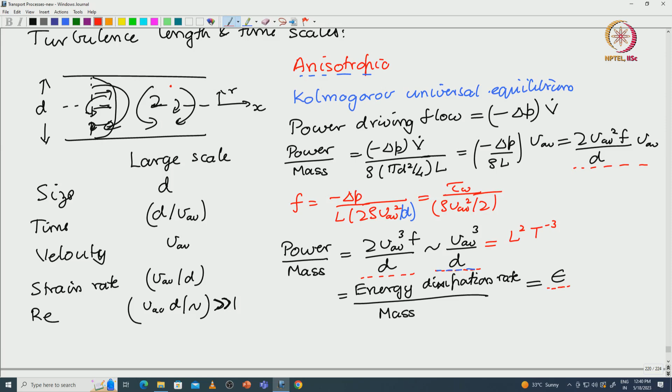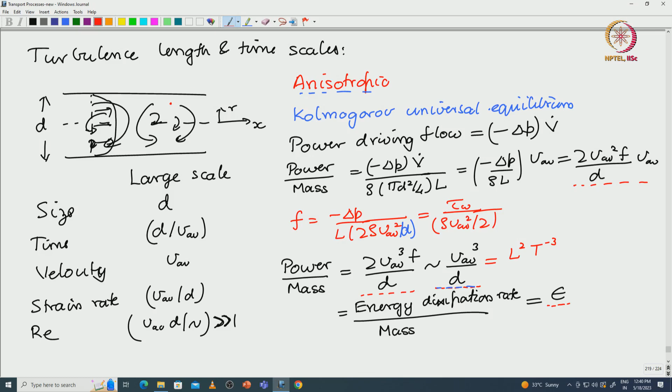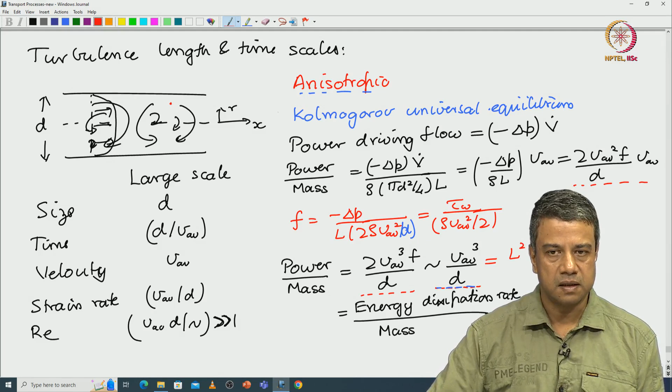We had calculated the smallest scales from the requirement that all of the power that is input at the large scales has to be dissipated by viscous dissipation at the smallest scales. That was one consideration. The other consideration was that the smallest scale features do not depend directly on the length and the velocity of the large scales. It depends only upon the rate of dissipation of energy per unit mass, whatever energy is input at the large scale has to be dissipated at steady state. That is one requirement. The second requirement is that the dissipation is due to viscosity, and therefore the small scales depend on the energy dissipation rate per unit mass epsilon and the kinematic viscosity.

Based upon that, we had got the smallest scales, the smallest Kolmogorov length, time and velocity scales, as well as the strain rate. These are Re power minus 3/4, minus 1/4 and minus half smaller than the large scales. Therefore, the smallest eddies have a length that is Re power minus 3/4 smaller than the large scales in the limit of high Reynolds numbers. The velocity is Re power minus 1/4 and the time scale is Re power minus half.

Strain rate in the smallest eddies is much larger than in the large scale eddies. It is Re power plus half larger. What that implies is that the energy dissipation rate in the small scales is much larger than that in the large scales, and it is equal to the energy input per unit time in the large scales.

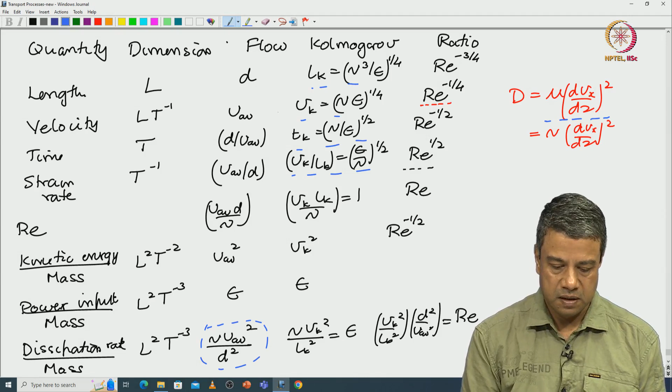So the picture that we had was of a cascade of turbulence, where energy is put in at the large scale due to the pressure difference that is applied across the ends of the pipe. Due to an instability of the laminar flow, there are eddies of different sizes that are created all the way from the large scale, the pipe diameter and the mean flow velocity, down to the Kolmogorov length and velocity scales.

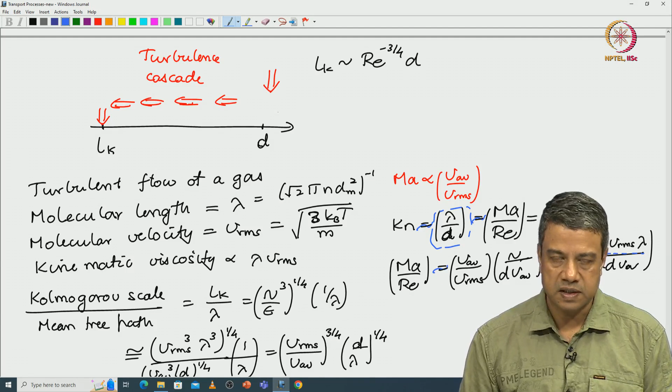At the Kolmogorov length and velocity scales, the Reynolds number based upon the Kolmogorov scale is 1. The Reynolds number based upon the large scale is much larger than 1, but the Reynolds number based upon Kolmogorov scales is 1. That means at the Kolmogorov scales, the inertial and viscous effects are comparable. Energy input at the large scale is dissipated by viscosity at these smallest scales. So the flow itself creates smaller and smaller scales such that at the smallest scales the energy input is equal to the energy dissipated, and that is how a turbulent flow is sustained.

Energy is put in at the large scales, the flow creates smaller and smaller scale eddies until all of the energy is dissipated at the smallest scales.

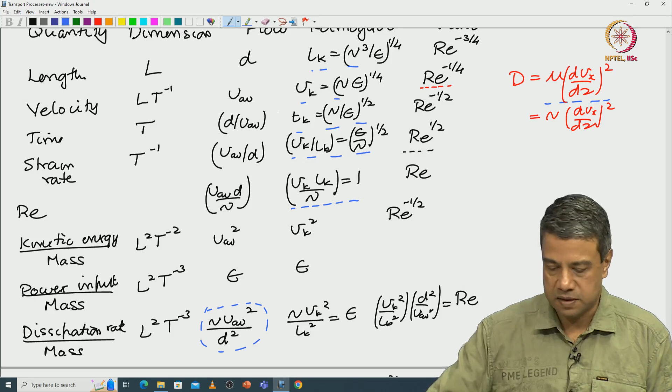I had shown you that for turbulence in a gas, the length scale of the Kolmogorov eddies is much larger than the length scale for the gas molecules, the molecular scale, that is the mean free path. For gas molecules, the molecular scale is the mean free path, the velocity is the RMS velocity, and the kinematic viscosity is proportional to the mean free path times the RMS velocity.

In these arguments that I make, I will assume that there are proportionality constants which we are neglecting, just to compare the orders of magnitude. We are not worried about constants that are order 1, we are only comparing the orders of magnitude.

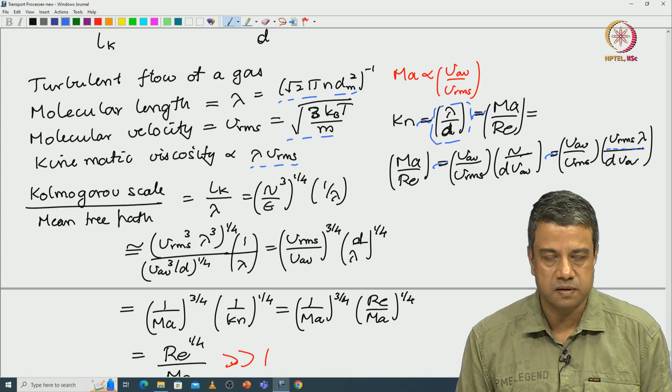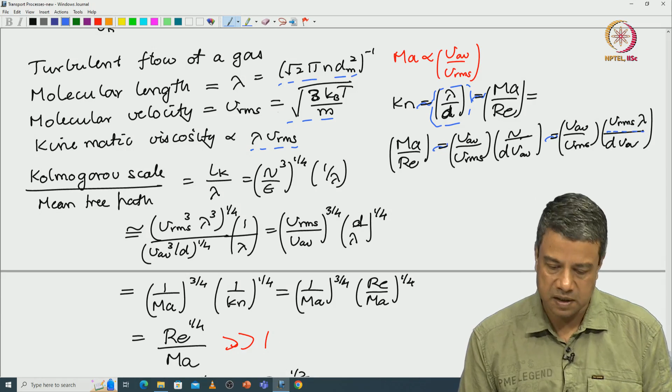So if I write the ratio of the Kolmogorov scale and the mean free path, and then substitute the mean free path times the RMS velocity for the kinematic viscosity, the ratio of the Kolmogorov scale and the mean free path is equal to Re power 1/4 divided by the Mach number.

For incompressible flow, the Mach number is much smaller than 1, the velocity is much smaller than the speed of sound. So the Mach number is much smaller than 1. That is the limit in which the continuum approximation is valid, when the flow velocity is much smaller than the molecular fluctuating velocities.

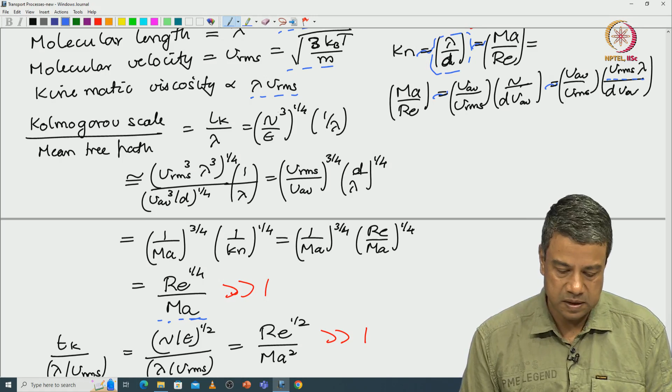In that case, Mach number is much smaller than 1, Reynolds number is large, so the ratio is large. Similarly, if you compare the time scales, the ratio becomes Reynolds number power half by Mach number square, which is also much larger than 1.

So turbulence is a continuum phenomenon. Even the smallest turbulence scales are much larger than the molecular scales in gases, in liquids also, because the molecular scales in liquids are much smaller than the molecular scales in gases.

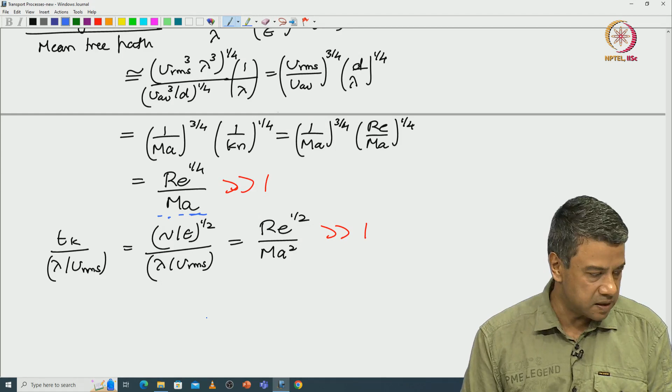So what we had discussed so far are the general characteristics of turbulence. Now let us examine the turbulent flow in a pipe in some further detail.

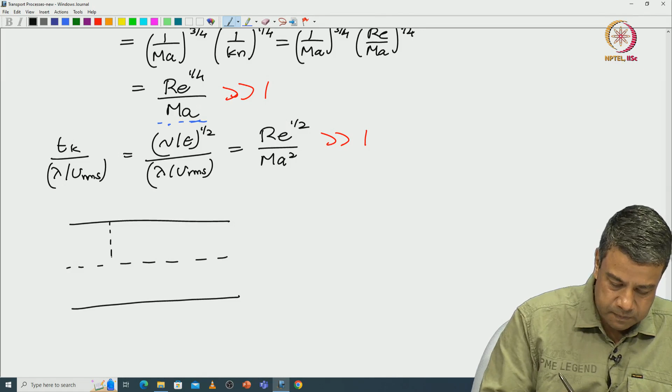Velocity profile in a pipe is more plug like at the center and has sharper gradients at the walls in comparison to a laminar flow at that same Reynolds number. A laminar flow at the same Reynolds number will have a slower, smaller gradient at the wall, and it would have a higher curvature at the center, at that same Reynolds number.

And there are large cross stream velocity fluctuations which tend to transport momentum across the pipe. Velocity fluctuations at the large scale are anisotropic. The fluctuating velocity in the flow direction is much larger than that in the cross stream directions.

At the smallest scales, these are isotropic. The velocity fluctuations take place, having roughly the same magnitudes in all 3 directions, for the smallest Kolmogorov scales.

Both the mean velocity and the fluctuating velocity have to satisfy the condition that they decrease to 0 at the wall. At the wall of the pipe, we have a no slip condition. So therefore, both the mean velocity and the fluctuating velocity have to decrease to 0 at the wall of the pipe.

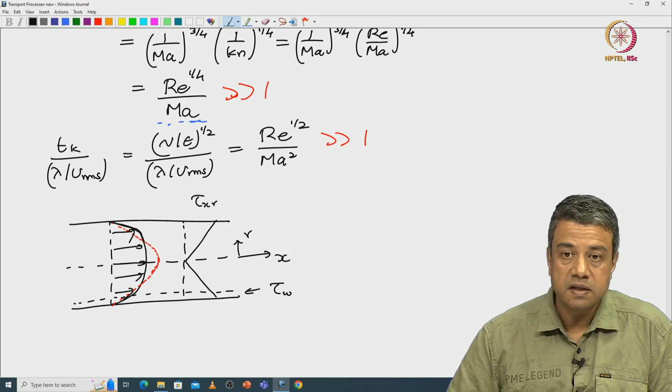This region where momentum transport close to the wall is by viscous diffusion, where the fluctuating velocity decreases to 0 and therefore momentum transport is due to viscous diffusion, is what is called the viscous sublayer.

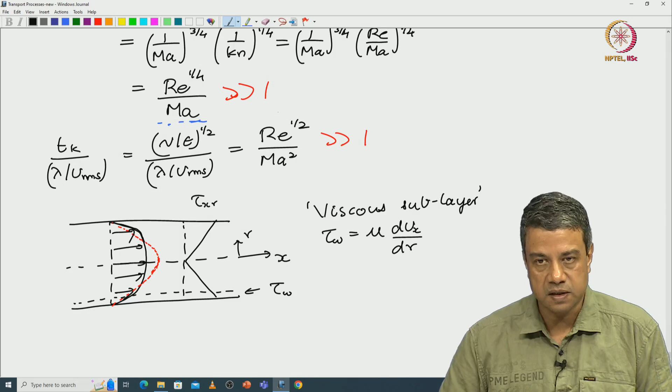And in this region the wall shear stress is equal to the viscosity times the velocity gradient close to the wall, because close to the wall the velocity fluctuations have to decrease to 0, so stress transmission has to be only due to momentum diffusion within this viscous sublayer.

In this viscous sublayer the velocity is much smaller than the velocity in the bulk, because the velocity decreases to 0 at the wall. What is the velocity scale in this viscous sublayer? You can get a velocity scale just from the consideration that because this viscous sublayer is very thin, the stress is approximately a constant. The stress varies very little within this viscous sublayer, and therefore this is basically a constant stress region.

So based upon the stress and the density, you can see that from dimensional analysis a velocity scale can be written as tau w by rho, whole power half. This is what is called the friction velocity.

A velocity scale that is determined from the wall shear stress and the density close to the wall is what is called the friction velocity.

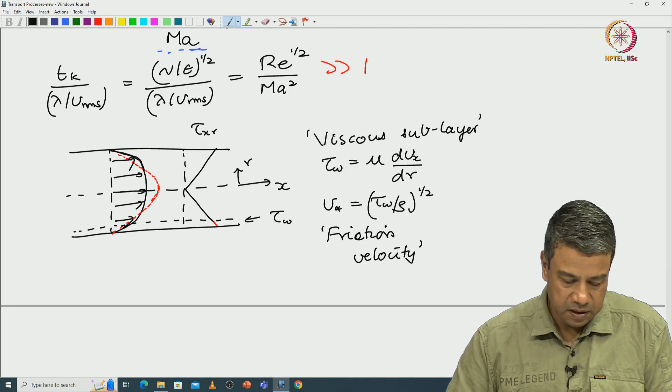If you focus closely on the region close to the viscous sublayer, the velocity in this region is increasing linearly. In the viscous sublayer, the velocity is much smaller than the average flow velocity.

That means you can scale the velocity in the viscous sublayer by the friction velocity alone. So the relevant velocity scale for the viscous sublayer is not the average flow velocity. Recall that when we solved for the bulk flow in the pipe, we had defined the scaled velocity as the velocity divided by the average flow velocity.

The velocity in the viscous sublayer is much smaller than the average flow velocity, and the velocity scale in the viscous sublayer is the friction velocity. Therefore, the scaled velocity in the viscous sublayer can be defined as Vx plus, which is equal to Vx by V star. That is the scaled velocity in the viscous sublayer.

What is the characteristic length scale for the viscous sublayer? The characteristic velocity scale in the viscous sublayer is the friction velocity, the ratio of wall shear stress and density, raised to the power half. In the viscous sublayer, viscous effects are dominant because the fluctuating velocity has to decrease to zero, and therefore momentum transport has to be due to molecular diffusion.

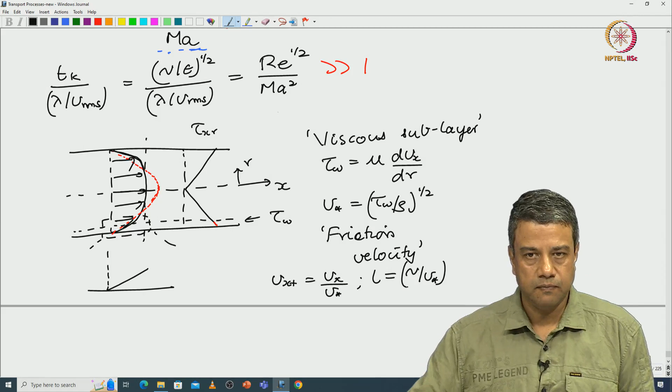Within this viscous sublayer.

If I write a distance W, which is equal to the pipe radius minus r, where r is the radius of the pipe, small r is the distance to some point within the viscous sublayer, then the distance W is the distance from the wall, which is capital R minus small r, within the viscous sublayer.

The scaled distance from the wall will be equal to R minus r divided by the length scale L in the viscous sublayer, which is equal to R minus r divided by nu by V star.

Even though the flow in the bulk of the pipe is turbulent, when you come close to the wall, from the no-slip condition, the velocity has to decrease to zero at the wall. Therefore, viscous effects have to become dominant compared to inertial effects within a thin region close to the wall. The large scale flow velocity and pipe diameter are not relevant for this.

What is relevant is only the conditions close to the wall, that is the shear stress exerted by the flow at the wall, and the kinematic viscosity, because transport is due to viscous diffusion at the wall.

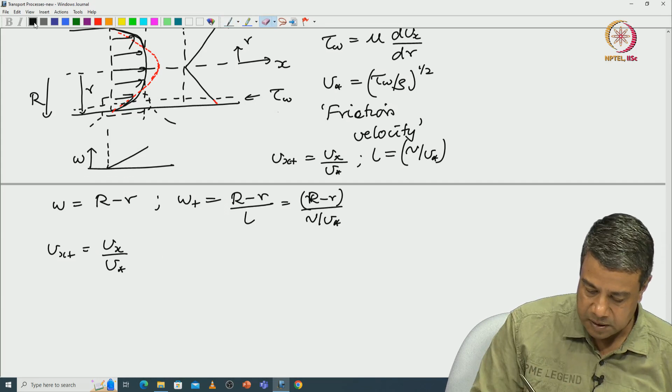The length scale can depend only on the kinematic viscosity and the friction velocity, which is nu by V star. Therefore, the velocity and length scales are Vx plus, which is equal to Vx by V star, the dimensionless velocity, and the dimensionless distance from the wall, W plus, which is equal to R minus r divided by nu by V star.

Note that the wall shear stress, tau W, is equal to mu dVx by dr, with a negative sign.

Substitute these expressions, mu V star, dVx plus by dW plus, and in going from W plus to this I will have nu by V star. I am just substituting in the expression for Vx and r, replacing Vx by V star times Vx plus, and r, the derivative with respect to r is negative, so I am replacing this by W plus here.

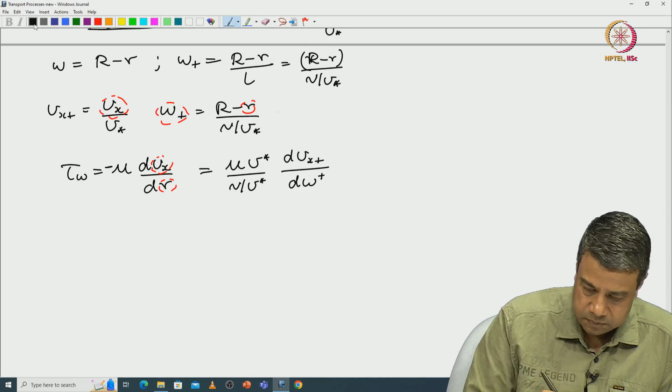Note that I had defined the friction velocity as V star is equal to root of tau W by rho, which implies that rho V star square is equal to tau W. Therefore, this tau W and rho V star square on the left and right cancel, and I find that the expression for the velocity gradient at the wall, dVx plus by dW plus, is equal to 1.

That means that if I am scaling it by the wall shear stress and the friction velocity and the length scale nu by V star, the velocity gradient close to the wall is universal, it is equal to 1. This implies that the velocity increases linearly, proportional to W plus close to the wall.

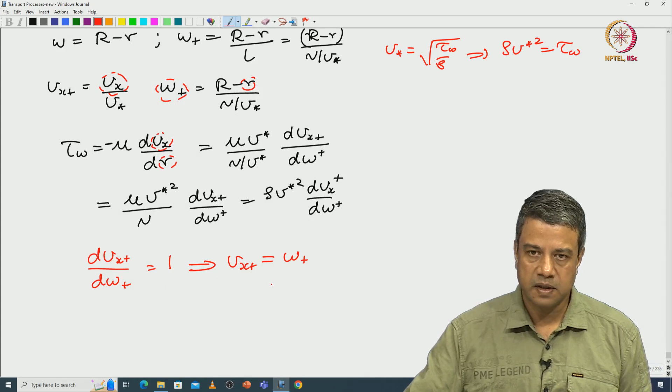So therefore you have a straight line for the velocity close to the wall where Vx plus is equal to W plus. Now this is a requirement in the viscous sublayer. What about when you go outside of the viscous sublayer? What expression for the velocity do we get from experiments? The experimental results are shown in a graph which is called the von Karman plot.

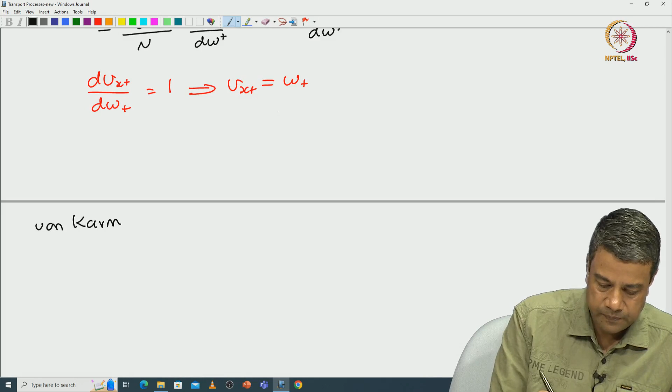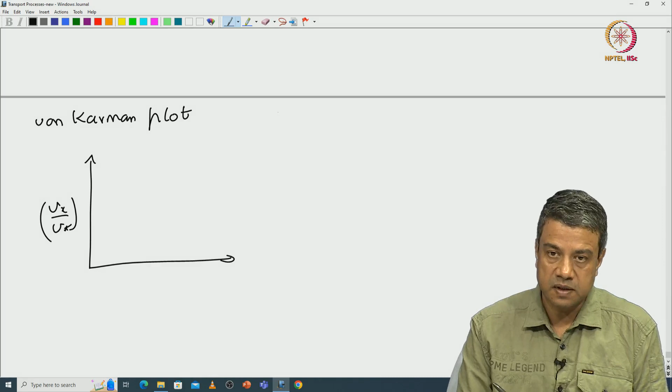Usually it is plotted as Vx by V star, where Vx is the mean velocity profile, that is, averaged over the fluctuating velocity. This is plotted as a function of log of W plus. You should plot it linearly to get a straight line of slope 1, but it is usually plotted as log, and because of that you get a curve that looks something like this in the viscous sublayer, a straight line in a linear plot.

Versus W plus, this would be 1. Let me write it in a dashed line. This would be 1 in a linear plot.

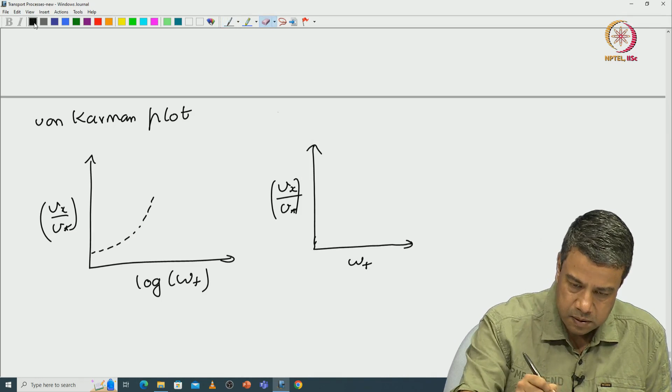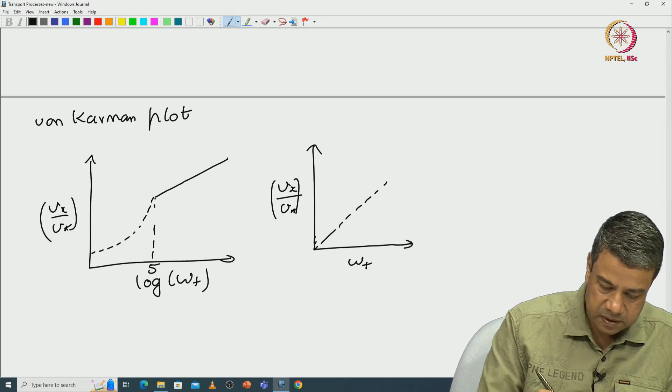In the von Karman plot, it is plotted as a function of log, which is why you get this curve over here. This happens up to a value of W plus of approximately 5. From a value of approximately 5 to a value of approximately 30, you get a straight line. So this is the viscous sublayer.

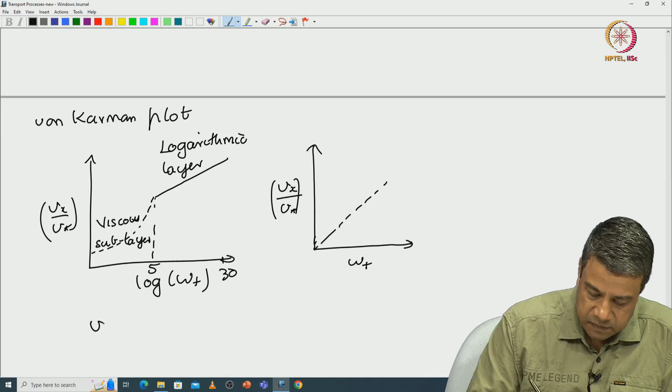And from a value of 5 to a value of about 30, you get what is called the logarithmic layer, where the velocity follows approximately a logarithmic profile. That velocity Vx plus can be written as 1 over kappa, log of W plus, plus a constant.

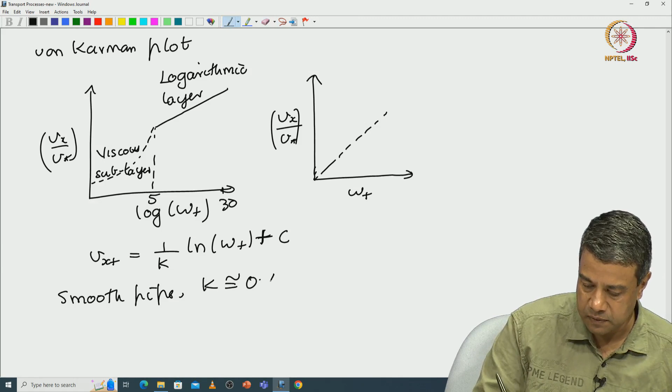So you get a universal viscous sublayer when you define it as velocity scaled by friction velocity, and then you get a universal logarithmic layer. For a smooth pipe, kappa is approximately 0.41 and C is approximately 5.5. This is for 0 less than or equal to W plus less than or equal to 5, this is from 5...

So that is the universal velocity profile that we see in this von Karman plot. It is linear up to the viscous sublayer, which is a requirement because the fluctuating velocity has to decrease to 0, the stress has to be viscous, and therefore the velocity gradient has to be constant in this constant wall shear stress region. Beyond that point, you can show using asymptotic analysis that the velocity has to be a logarithmic function of position. That calculation is outside the scope of this course, but nevertheless this logarithmic dependence is seen in experiments.

I should caution you here that these constants are approximate. This is an active area of research where progress is continually made, and these constants by latest estimates are slightly different from the classical theories proposed for this viscous sublayer and logarithmic layer. However, these are still approximate constants that can be used to make estimates.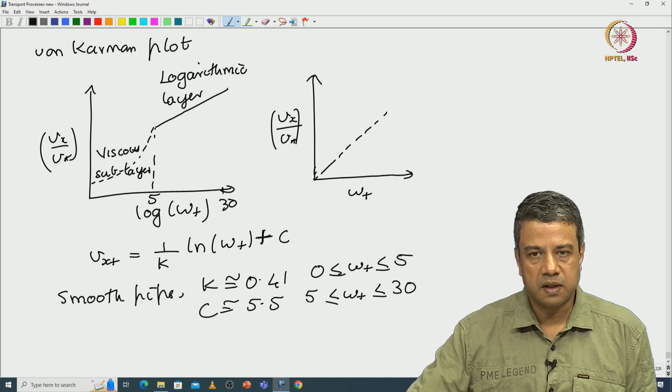And then you have a bulk flow near the center of the pipe. So this region very close to the wall is the viscous sublayer.

W plus less than 5. From 5 to about 30 is where you have the logarithmic layer, and then beyond that you have a plug flow, where there is virtually no change in the average velocity with respect to position - a plug flow. So, this is the structure of the flow in a pipe.

Even though the flow is turbulent, very close to the wall it has to become viscous dominated because fluctuating velocities have to decrease to 0. That happens when W plus is less than about 5, or the distance is less than about 5 times nu by V star, where nu by V star is this length scale close to the wall. V star is the velocity scale based upon the wall shear stress in the region close to the wall where the stress is approximately a constant.

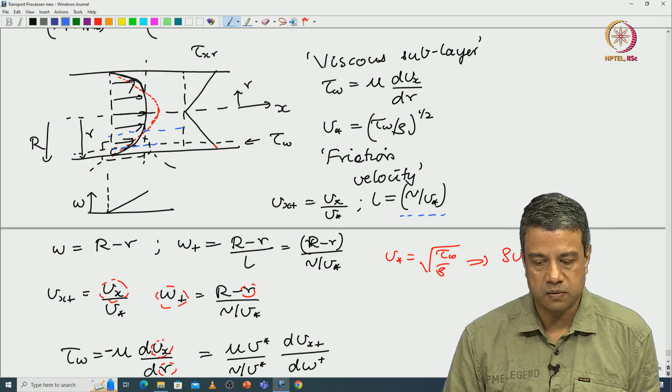So, these are the characteristics of flow in a pipe. And finally, I will end with a problem of how the friction velocity is related to the flow Reynolds number. The flow Reynolds number and the friction Reynolds number, how are they related? And how can we estimate the friction Reynolds number from the flow Reynolds number? So, what is the friction Reynolds number?

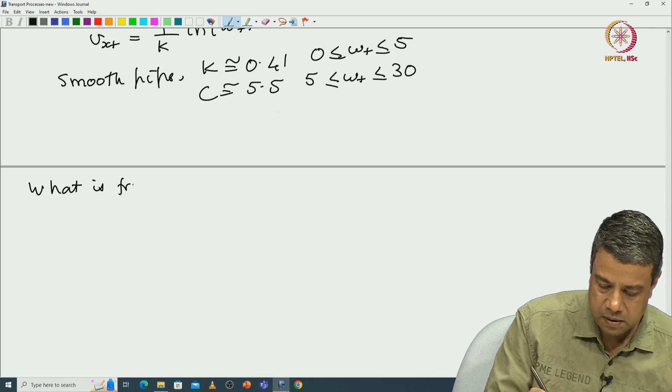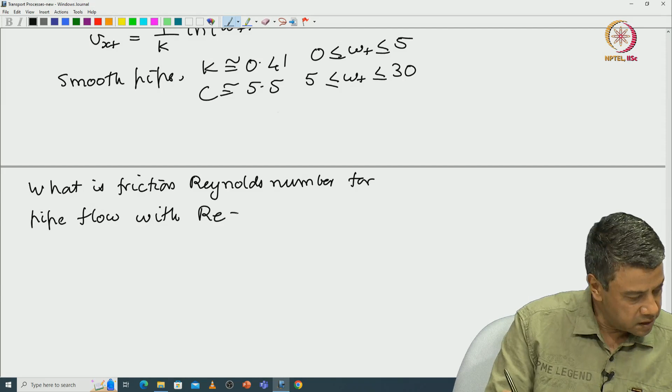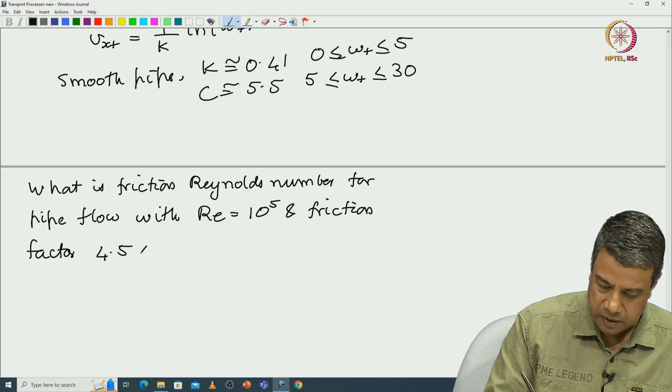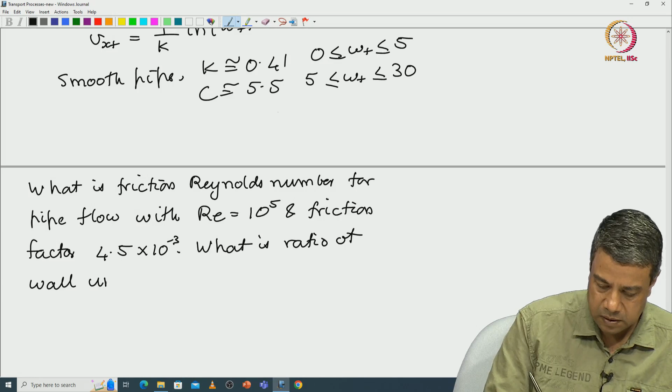For pipe flow with Re equal to 10 power 5 and friction factor 4.5 into 10 power minus 3. What is the ratio of wall unit - by wall unit I mean this wall length scale - and the pipe diameter?

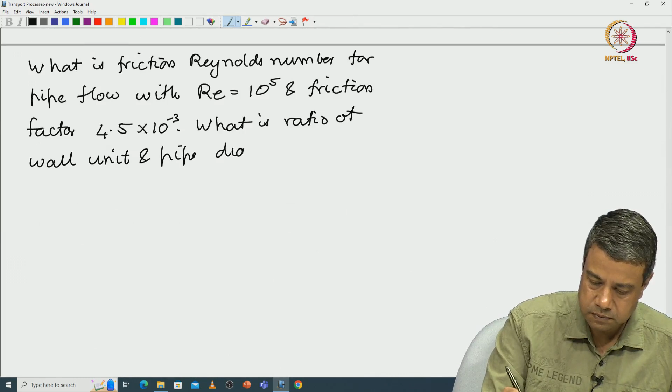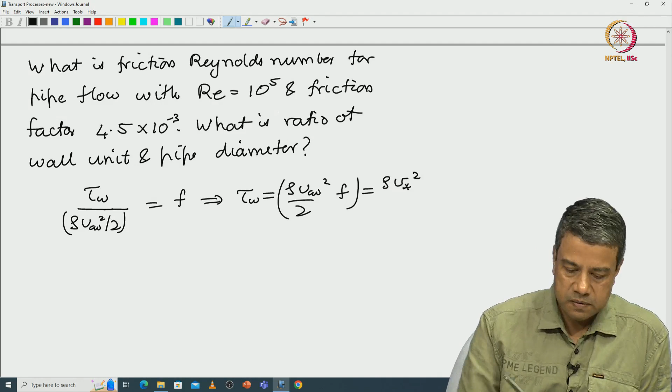Recall that when expressed in terms of the friction velocity, this can also be written as rho v star square. From this we find that the friction velocity is equal to V average times root of f by 2. So that is the relation between the average velocity and the friction velocity through the friction factor.

Reynolds number - let me write this as friction Reynolds number, rho v star d by mu, into V star by V average, into root of f by 2. It is equal to Re root of f by 2.

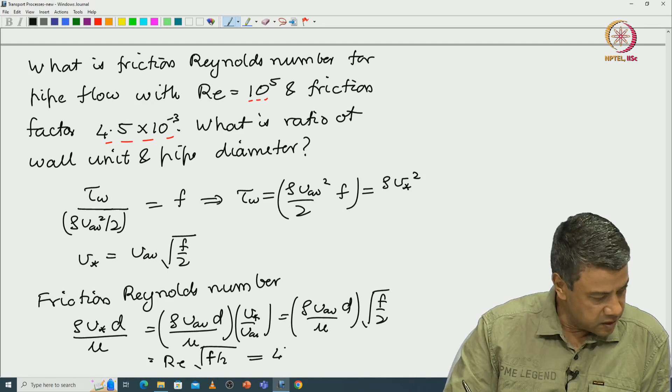So, in this case the Reynolds number is 10 power 5 and the friction factor is 4.5 into 10 power minus 3. So, this you will end up getting as 4743. So, this is the friction Reynolds number Re star based on the friction velocity, the pipe diameter and the viscosity.

What is the length of the wall unit? L is equal to nu by V star, which means that the ratio of the wall unit and the pipe diameter is equal to nu by d V star. This is of course just the inverse of the friction Reynolds number, and in this case it is equal to 2.1 into 10 power minus 4. I just take the inverse of this Reynolds number and I get 2.1 into 10 power minus 4.

So, the viscous sublayer is of course about 5 times this wall unit. So, the ratio of the wall unit and the pipe diameter is 2.1 into 10 power minus 4. So, if your pipe had a diameter of about a centimeter, the viscous sublayer will be approximately 2 microns times 5, which is about 10 microns at the wall. That thickness is small - it's about 1,000 times smaller than the pipe diameter at a Reynolds number of 10 power 5. However, it is still much larger than the molecular scales.